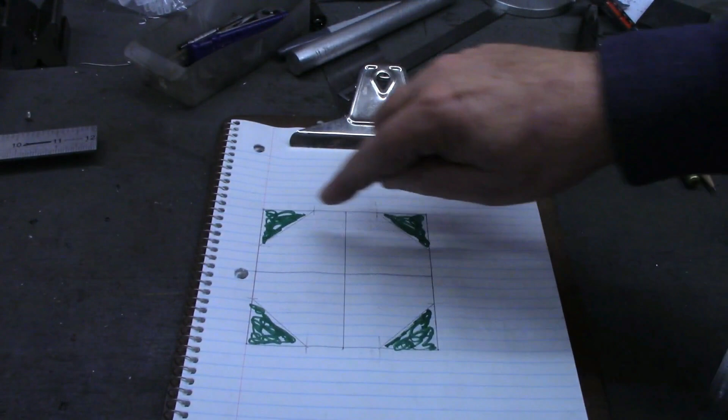In the first part you saw us do the octagon portion, and now in this second part we're going to do the hexagon and do the demo. Alright, we just took this out to form our octagon.

Now I'm going to come back in here. I know the circle that I'm going to put in here, which will be the next to the last step, is going to be 2 inch. So I'm going to set my compass up with a radius of 1 inch and just give a little indication right here.

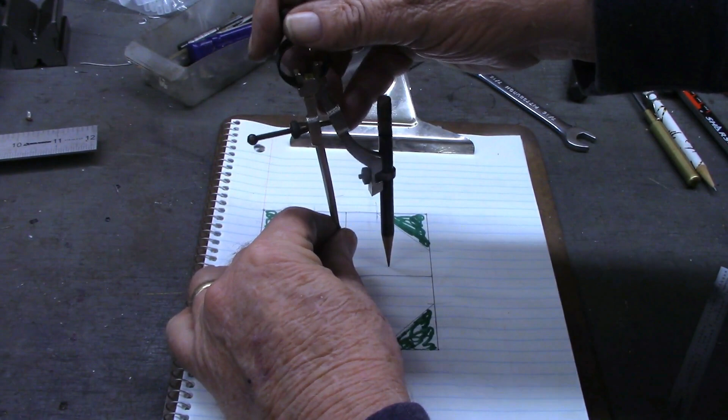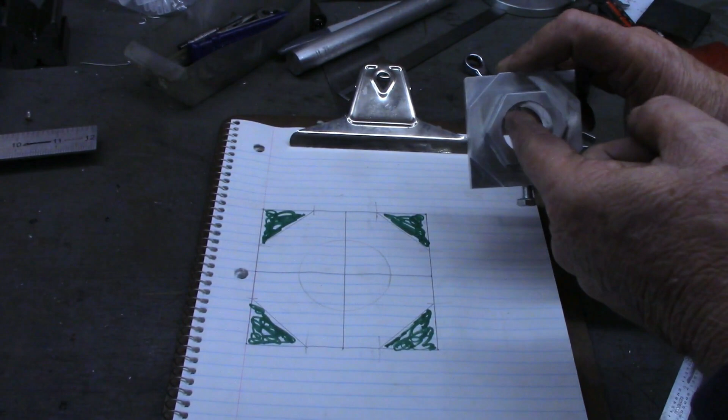I've already got this figured out, but I want to show you how I come up with that. So that's what the inner circle, inner hole is going to be. We want our hexagon edge to be somewhere in between, approximately halfway in between the edge of this circle and the edge of the octagon.

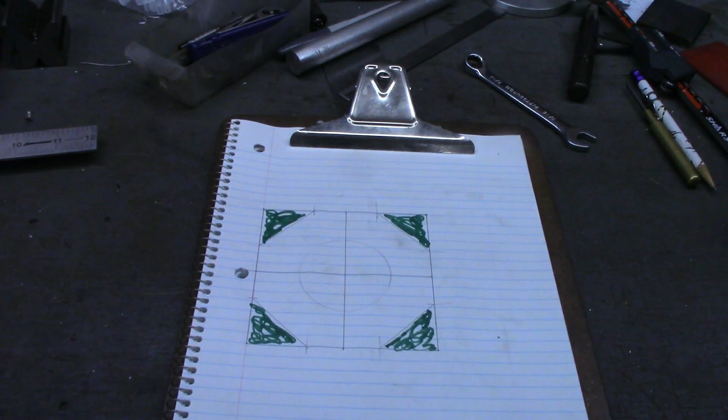So I'm just going to take my rule, and that looks like about 1.4, 1.5 to the center. This is no precision measurement required at all. So what I'm going to do is set my compass at 1.45.

Now for the hexagon, we want a circle to begin with instead of a square. So I'm going to put a good serious circle there. Now here's where

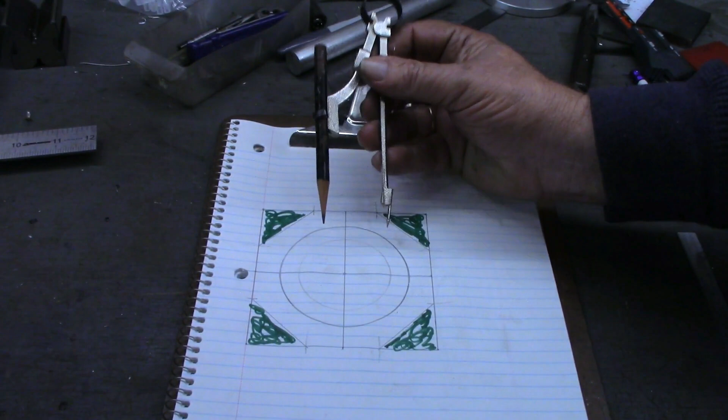The X and Y center lines that I put in come into play. With my compass still set at the radius of the circle we're going to make a hexagon out of,

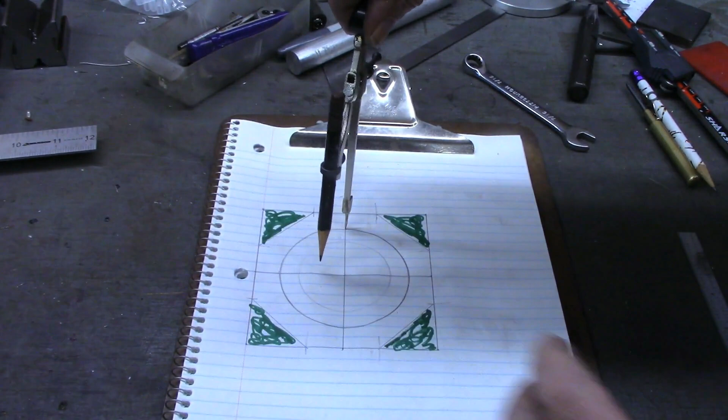Where that circle intersects that center line, I'm going arc, arc, same thing at the bottom, arc, and arc. Now, 10th grade geometry is coming back to you, isn't it?

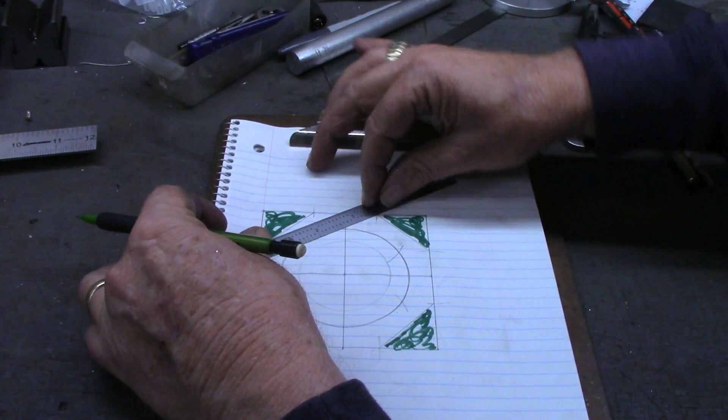So what we're going to do is join the point that we pivoted the compass on and the arc that we made, and then each arc to arc. Remember what I said, these on the workpiece are just going to be guidelines to mill close to and use as a guide. So there's our 6 sides, 1, 2, 3, 4, 5, 6.

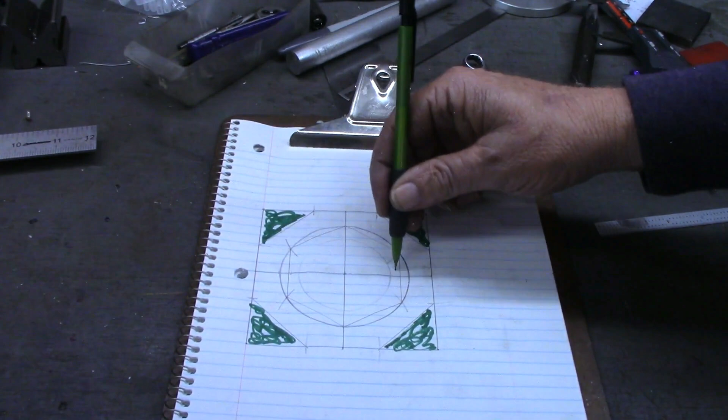Now what we're going to go back and mill out, we'll mill out the rest of that after I lay out the hexagon on the workpiece. I'll do that, meet you back over at the vise.

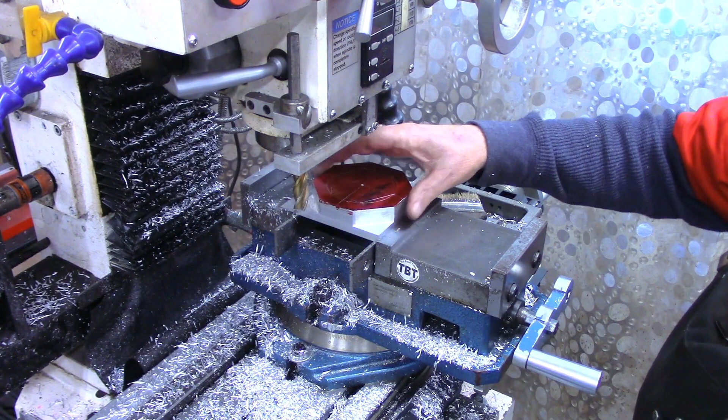All right, I got the camera up high again, and you can see I've got the workpiece in here, and here's our 6-sided hexagon laid out on the workpiece. Now, with this set back to 0, I can get a good deal of what I got to mill out off of these 2 sides here.

So again, I'm just going to touch off, just to get a good starting point, so I know how much to advance. And remember, we're only going 330 thousandths deep this time.

But I'm going to go ahead and mill this out to this line here, move over to this side, and mill out to that line. I'll bring you back when I get ready to adjust the vise.

Okay, I milled these 2 sides right here, which was these two flat sides of a hexagon. And then I failed to turn the camera on, but I swung the vise to 60 degrees. Then milled these two sides.

Now, I milled this one, then I moved over to mill this one, and as I was milling it, remember I started way out here. As I was getting closer and closer to my line, I noticed that the cut was not lining up with the guideline that I had put on here.

I looked down here at my setting, and evidently I had not tightened the vise down good because it had moved over to, let's see, that would have been 70. It moved over to near about 70 degrees. But I saw that long before I got to the line.

This side lined up right with the line, so I knew the vise didn't move until I come over here. So I set it back to 60 degrees, and I still had plenty of room, plenty left to mill to get that back to the line.

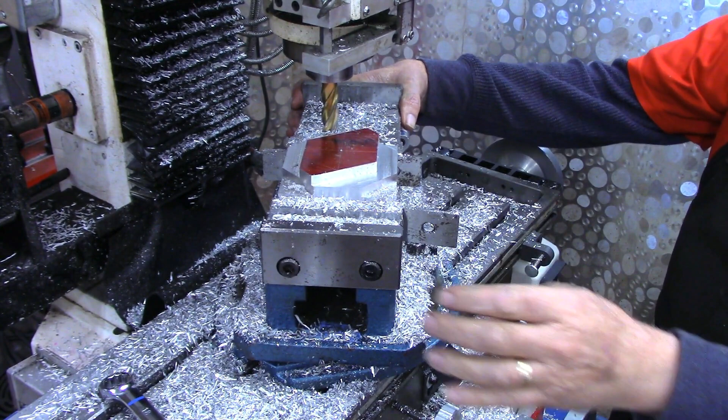Now we're ready for our last two lines. Now, I could move the vise all the way over to 120 degrees, find my mark on here, which is actually 60 on the other side of 0, or the other side of 90 down here. But I may run out of space back here.

So let's do this. Remember, we started out at 0 and did these. Then we went to 60 degrees and then did these two. Let's go back to 30 degrees, and instead of cutting on the y-axis, we can use the power feed and go on the x-axis if I got enough room to get over here. Let me double check that, which is going to be very questionable.

Nope. So what we need to do is bring our vise right on around. Right here's the 90 degrees.

So if we line up on the 60 over here, which is basically 120 degrees, we see that we're in line. Let me get my handle off. That's going to be very close over here as well, but I think we can get it. Let me tighten that down.

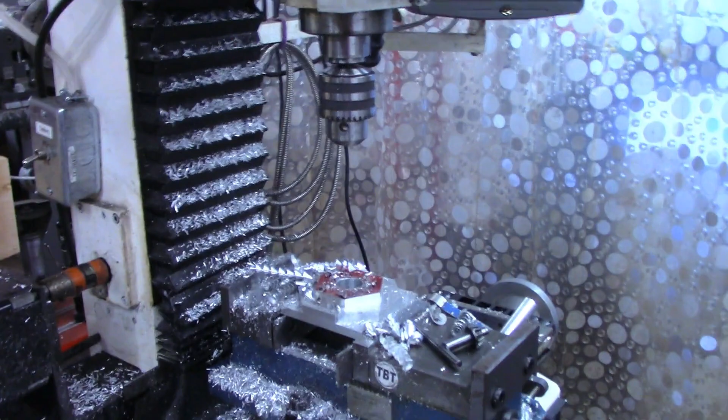All right, that should be pretty close to the 1 inch. And you know the routine, just keep advancing this.

Pretty aggressive to begin with, but I'm going to do that until I've got about 2 inches or just a little over, because I want a 2 inch piece to go in there without having to finagle it or try to convince it to go in.

So we've got a little boring to do here. I'll bring you back when we get a little closer.

All right, I think this cut is probably going to do it, but I'm going to set the DRO, zero it out, so after I make this cut, I can bring the work out here and try this piece. This is a piece of 2 inch right here. Remember, I'm looking for a loose fit on 2 inch.

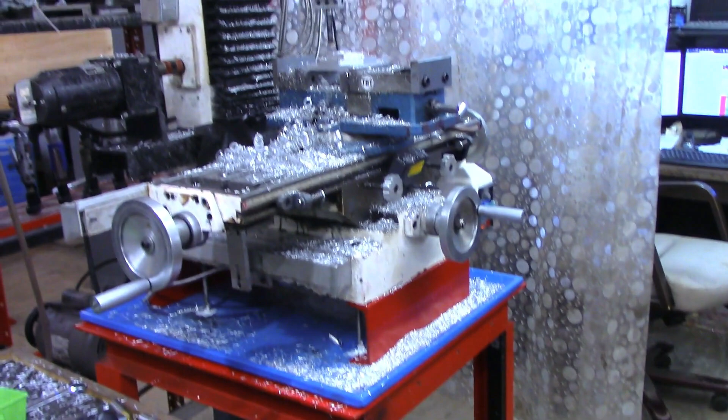So while that piece is cooling off a little bit, I'm going to vacuum that up. I'll take the workpiece out, carry it over to my Scotch-Brite wheel, and just clean up some burrs on it. I won't try to carry the camera in there for that, but we'll come back and do the final step on this, and then we'll be ready to give it a test.

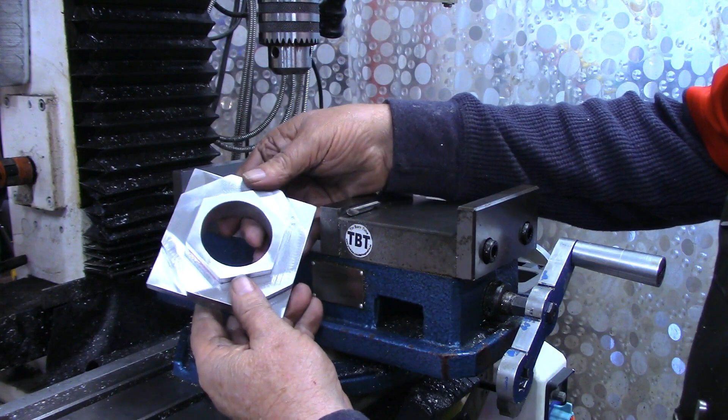Okay, I got the mill cleaned up just a little bit, and I carried the workpiece over to the Scotch-Brite wheel and cleaned it up some. I may carry it back and clean up these mill marks a little bit more, but I wanted to do a check as well.

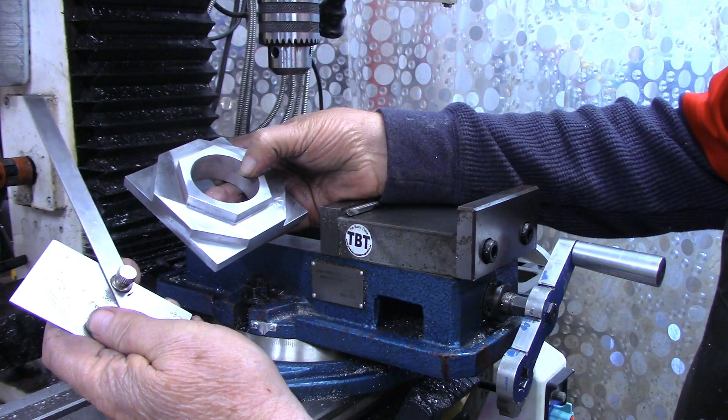That's dead on 45 degrees. Checking it all the way around. Now if we check our hexagon, we should be dead on the 60 degrees, which we are.

So we got one more step to do on the tool. While I had it out, put a center mark centered from outside edge to outside edge, and then the two inner edges.

So we'll mount that back up in our vise, and we'll just use the center drill to line it up with. All right, we're going to drill and tap this for a 1/4 20.

Now there's no need at all of threading that whole length from here to the inside. Let me get an approximate measure there, let's see where I can get my tool. Well, it should be the same out here. That's 0.95, so 475 thousandths.

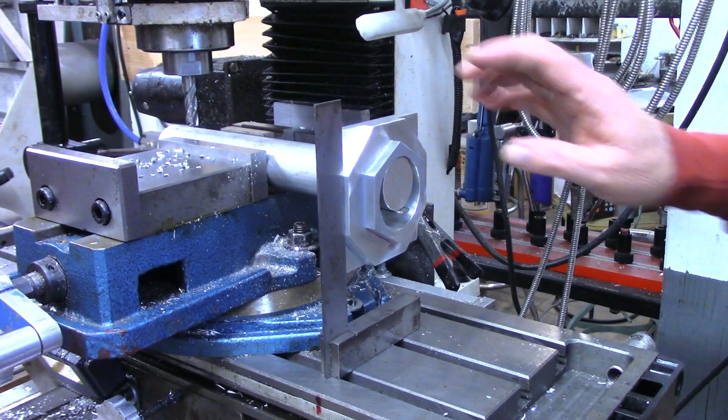All right, I've got the mill cleaned off just a little bit. What I've done is set our indexing jig up with the bolt. I've tightened it on this piece of 1.5 inch material. I'm going to put a hexagon on the other end of it. Hopefully you can see in the upper right hand corner of the screen the little camera I've got set up on the actual milling action. But what I've done is set the index up with the square on the table to one of the sides on the hexagon.

So now let's mill that. Over here I've got about a, I'm coming down about 100 thousandths. I'll have the x-axis locked. Maybe just a little long on the x-axis. I'm going to back up just a little, lock it back down again.

Now we want to index 45 degrees. So I'm going to loosen my mill vise just a little. Make another cut.

We'll continue this process for each of the 8 sides.

Notice over here in the little camera, I do have a work stop on here to keep my x-axis the same. One thing about this, if you start to get chips in here, if you need to take your work out and clean it out, that's not a problem whatsoever. You just go back in up to the work stop.

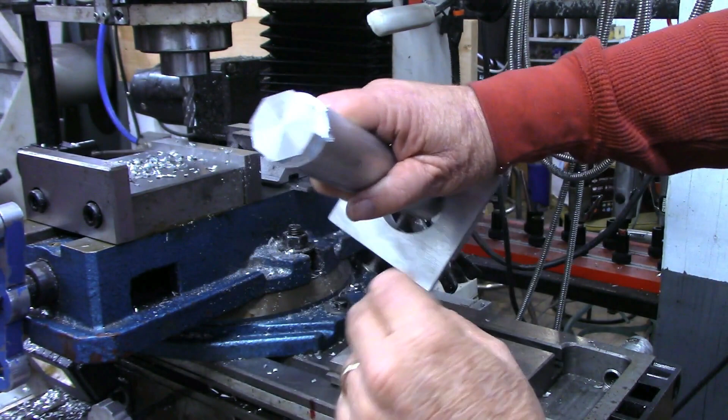Alrighty, I'm going to take the workpiece out. Turn it around here to the larger camera. Of course, I've got some burrs in. Give me just a second. Let me walk around in there to the Scotch-Brite wheel, clean off some of these burrs, and I'll be right back.

So here we have our 8-sided octagon milled into the end of a piece, and did that with the index that we just created.

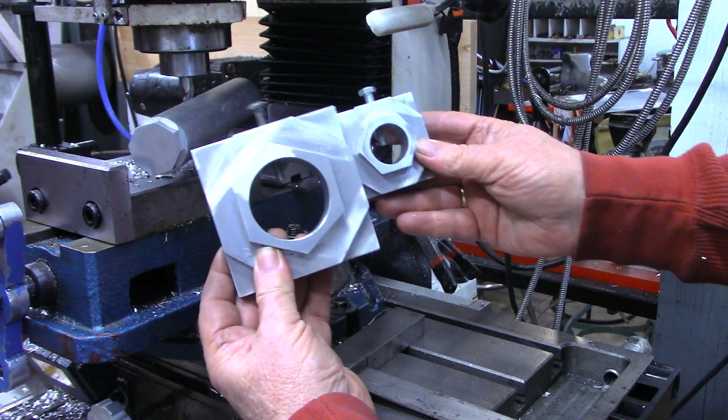As I said, I'm going to have 4 of these in the end. I've got this larger one that we just created. I've got the smaller one that I created as a prototype. In the next video, what I plan to do is using round stock, make an index for a 3-side and a 5-sided. That way I'll have a 3, a 4, a 5, a 6, and an 8.

Which are all, of course, factors of 360. Hope you enjoyed this video. Stick around, there's more to come in this series of making indexes. Take care, and I'll see you on another video.